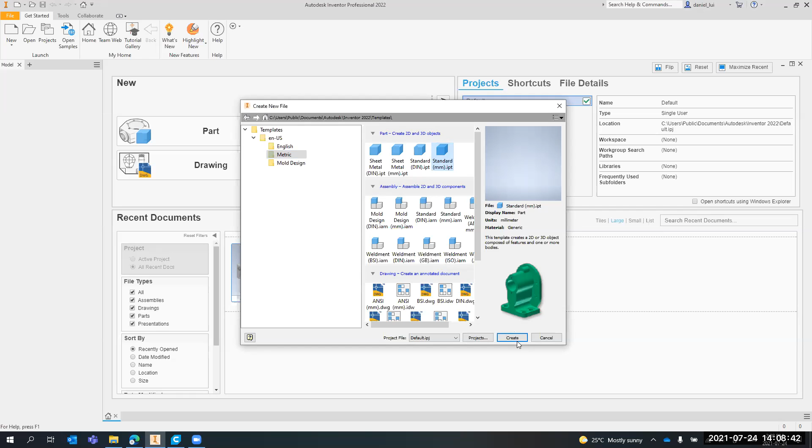You want to open a standard millimeter file. You can also open an inch file if you want, which would be in imperial units, but I think millimeter is easier for everyone to work with. So let's all use millimeter to standardize it. I'm going to create a millimeter part file.

And this is your canvas, your blank canvas. You have nothing right here. Okay, let me return to the slides. Where are slides? Here are slides.

Now we can look at the general interface of Autodesk Inventor, how to look around. So number one is the view cube. You would use the view cube to look around. Most of you have probably looked at Tinkercad already, and Tinkercad has the same view cube. Switching to Autodesk Inventor, it's this thing right here. This is the view cube, and you just drag it around like this to look around. Of course, right now it doesn't make a difference because we're just looking at blank space.

But that's what you would use when you have a part and you want to look at different angles of it. Okay, what's next then? On the left side, you have the model browser where you can see all your created features. Right when you start your part, you're not going to have any of this, just your default things, and it's not going to do much. But as you make more things, extrusions, fillets, you're going to see more things fill up here, and this is where you keep track of all the different features you make.

So then you might ask, what is a feature then? A feature is any object that is of interest. So a sketch, maybe if you're to draw a circle, you could call that a feature. Maybe if you're to make that into a cylinder, you can call that a feature too. Anything that is of importance will show up on the left side as a feature.

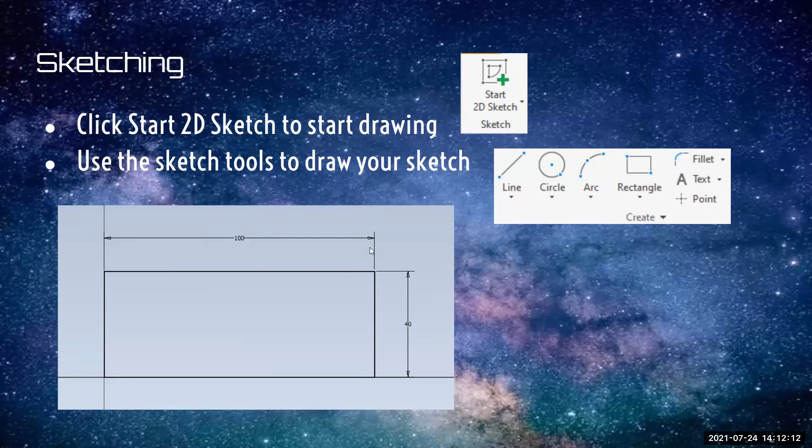So you may click Start 2D Sketch to start a drawing, and that's this button right here. And then you may use the sketch tools to draw your sketch. So what does that translate into in Autodesk Inventor? If we go here, you'll see the button here, it says Start 2D Sketch. So I'm going to click that.

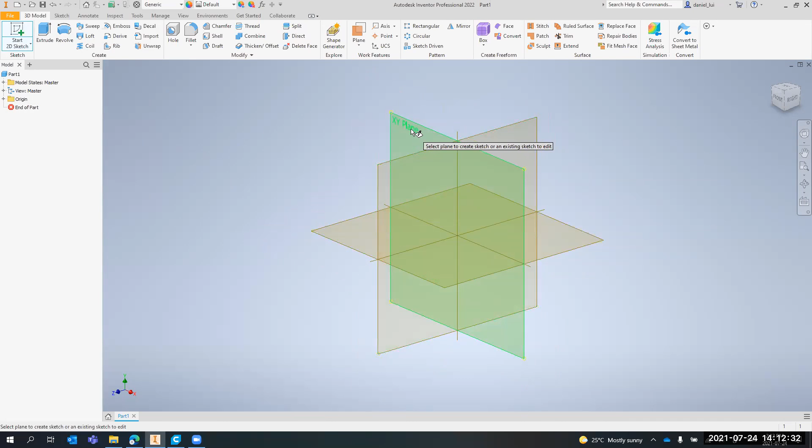And it's going to present me with three planes: the XY plane, the XZ plane, and the YZ plane. Typically you can probably start with the XY plane. It doesn't matter, but I'm just going to start with the XY plane. And you got your coordinate axis - you can see down here, left to right is X, and up and down is Y.

So I'm going to draw a rectangle then, to start my car body. And what dimensions do I want to make it? I'm just going to make it to the maximum dimensions, so that's 100 millimeters. Let me zoom out a bit. 100 millimeters by, how much was it? 50 millimeters.

Right then. I just noticed something actually. This might be relevant to you.

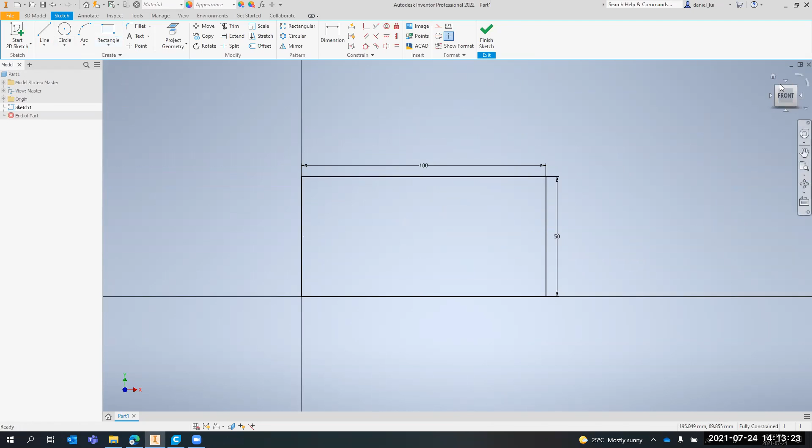If you installed Inventor and looked around, you might have noticed that when you try to zoom out by scrolling the mouse wheel downward, you're actually zooming in, and when you want to zoom in, you're zooming out. That's kind of a weird quirk, and I can show you how to fix that right now.

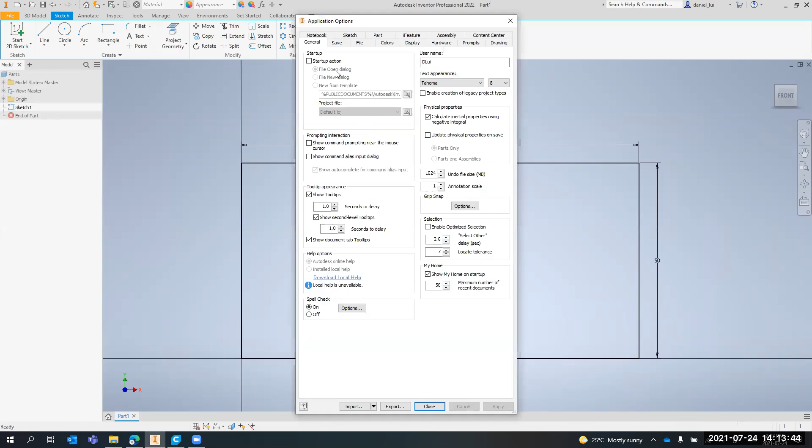If you go to File and click Options, then go to... let's see here. Hardware prompts, gotta be somewhere here. Oh, right here. If you go to Display, you can go to Zoom Behavior and Reverse Direction, and click Apply. That makes your zoom more intuitive, because typically people would expect when you scroll the wheel down, you zoom out, and when you scroll up, you zoom in. So that's how you do that.

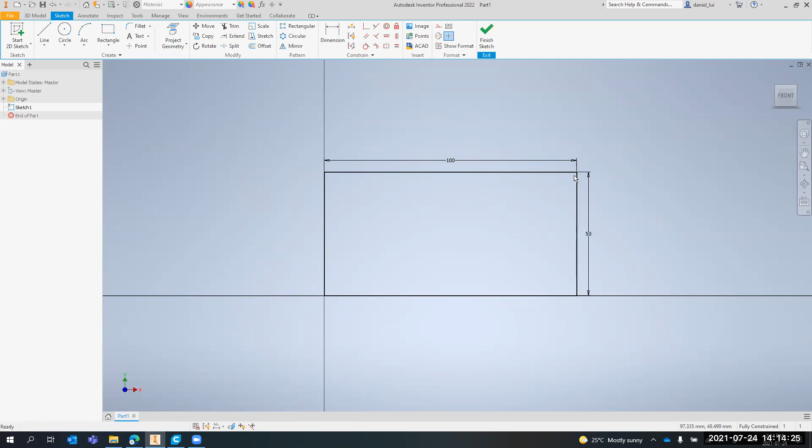All right, back to the slides then. So you can see here I have made my rectangle, right? And it's... oh, sorry about that. That should be 40, shouldn't it? There we go, 40. All right, 100 by 40, and that's just a regular rectangle. So that's what that looks like then.

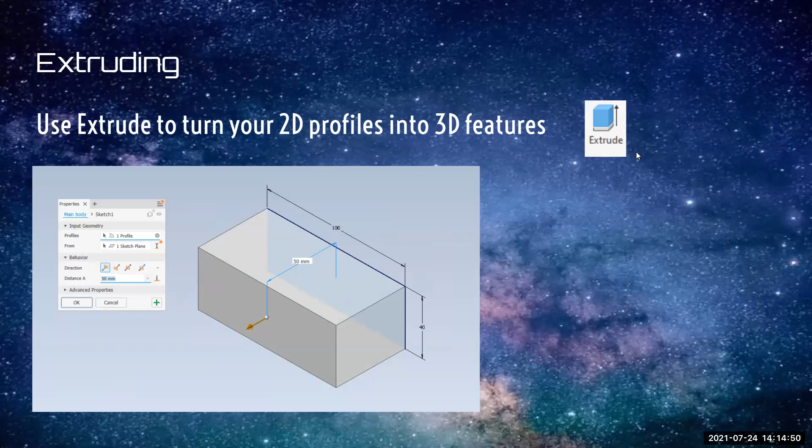So after I make a 2D sketch, I want to make it 3D now, right? What I can do is finish the sketch by clicking Finish Sketch, and click the Extrude button to turn my 2D profile into a 3D feature. So back to here, I will click Finish Sketch. And as I click Finish Sketch, you will see I now have Sketch 1 here.

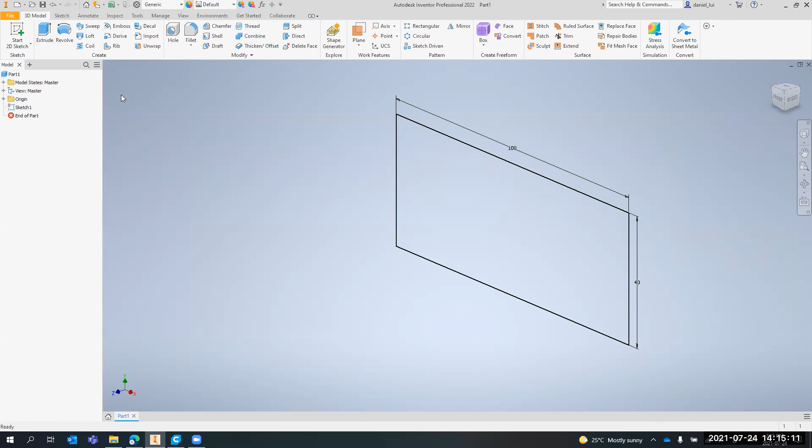And if I hover my mouse over it, it highlights it. So that's my first feature. But I want to turn that into 3D, right? So I'm going to click Extrude, and it's going to select that sketch feature profile.

And I'm going to extrude it by 50 millimeters. Down here, distance A, you can enter whatever number you want. I could enter 9,000, and it would be a super long extrusion. But 50 is the limit of our car design, so I'm going to put 50. Up here you can flip it, or make it go both ways, to different distances in each direction. But this is your basic extrusion, which is 50 millimeters in this way.

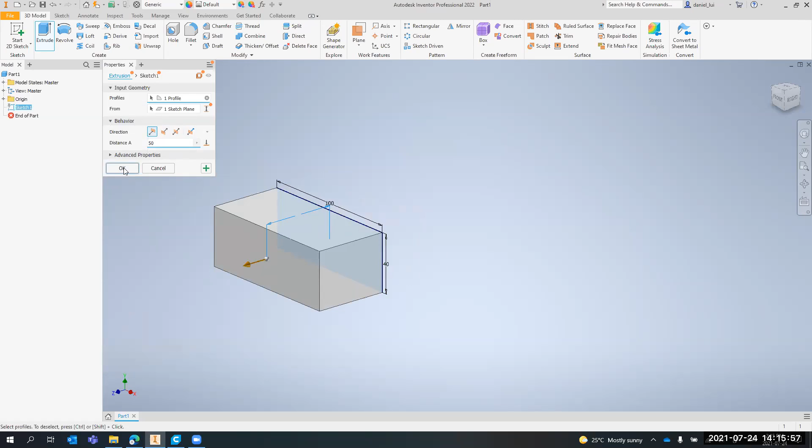So I'm going to click OK. And there we go, I got a box now. If you look on the left side in the model browser, you can see Sketch 1 has disappeared. That's because Sketch 1 has been used in the process of creating Extrusion 1. If I click the plus here, I can expand this list, and you can see Sketch 1 is now part of Extrusion 1. We had a sketch, and we evolved it into an extrusion.

All right, back to the slides then. How to edit an existing feature. A lot of times when you finish a part, you will want to edit that part, maybe make the extrusion longer or shorter.

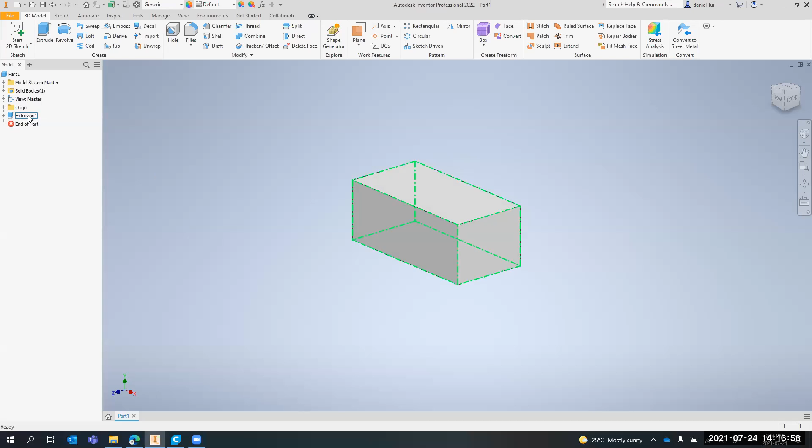So how you do that is you double click on a feature in the model browser, and you will enter the settings for it. Let's say I want to edit Extrusion 1, because remember I extruded it by 50 millimeters. Let's say I want to make it 30 millimeters instead. So I would just double click it, and go straight back into the settings.

And if I want to go to the sketch, I just double click the sketch and edit it. When you click Finish, it'll update. But I'm not going to change it because I like how it is now.

And of course, you have this End of Part thing at the very bottom. End of Part is basically where you want to cut off the program from rendering your features. Right now, End of Part is below everything, which means it's fully rendering everything, so you can see everything I've done. I haven't done much, just made a cube, or a parallelepiped.

But if I want to not see what I just made, I can drag End of Part upward over here. Now I've gone back to a state of time where I have made nothing, so right now it's not a very useful thing to use.

Right now it's not a very useful thing to use, but say you have more things in the future and you want to see what it looks like at an earlier time, it can kind of be helpful.

Okay, moving on, putting text on a surface then. Before I do that, I suppose I should make this look more like a car. So I'm going to use all our previous knowledge to show everyone how to make a car shape out of this box shape.

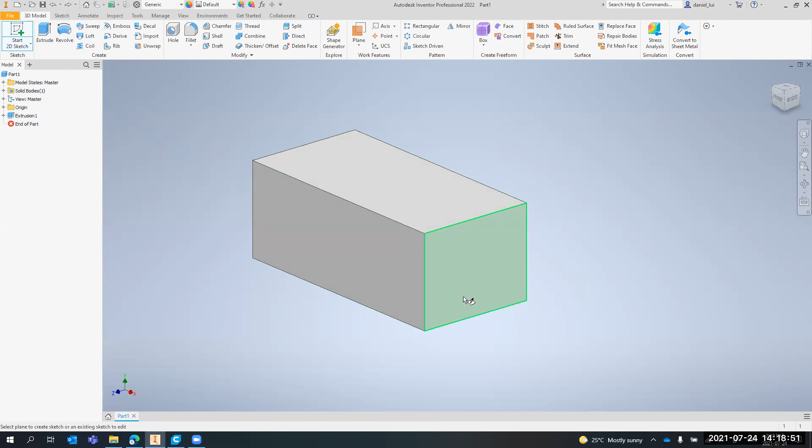What I can do is start a 2D sketch on any surface I've already made. I'm going to start it on this surface right here. Now I'm drawing on this plane. First, I want to make holes for the wheels. Let's say I want to make hubs so the wheels are recessed into the car body—maybe that's more aerodynamic.

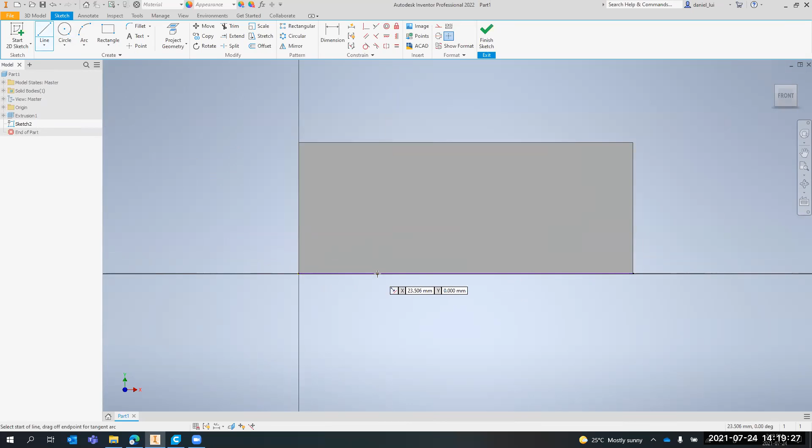So I'm going to use the line tool to help guide me to precise locations where I want to make holes. Let's say I want the center of a hole 5 millimeters from the bottom. I would go on the line here, go 5 millimeters up, enter 5, press enter. Oh, that did not work. Let me try again. I want to go 5 millimeters. Oh, that is not working.

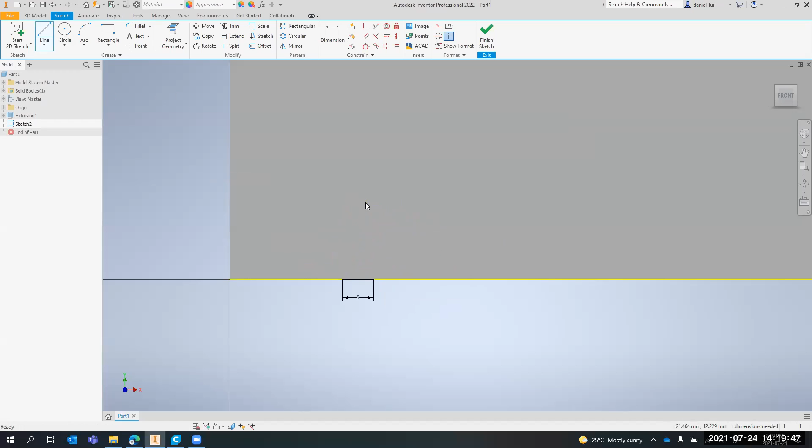Well, that worked. Okay, I just drew a line going up. If you want to change it, you can always press the dimension button here. You click this, and I want to make it 5. So there we go—we have a 5 millimeter line going upward.

And that can help us place our circle like this. Remember that the wheel is 30 millimeters in diameter, so I want to give it some clearance. So I'm going to say, let's go with a 33 millimeter wide circle.

Lastly, I want to make it like a car hub for a wheel, so I want it to be straight down here. I can go here—this is tangent to the circle. I can go straight down like that. This is tangent to the circle. I'll do the same thing on this side.

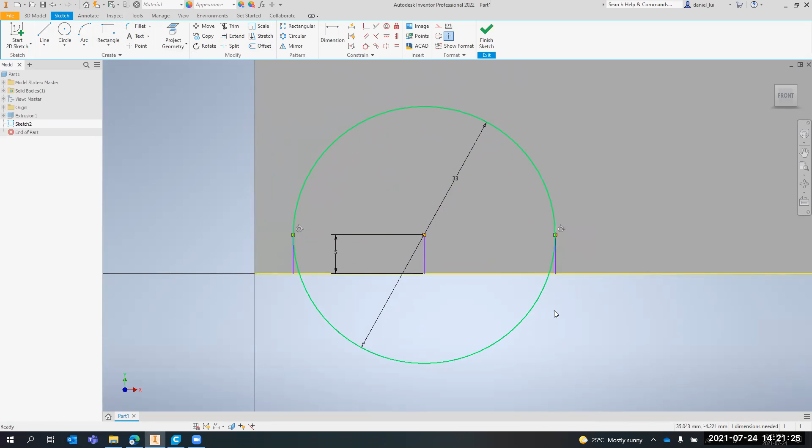Now what I want to retain is this outside part, so I can delete what I drew before—I'll delete the circle. Not yet, actually. Before I delete the circle, I want to make an arc. So I'll use the arc tool: click first point, click second point, draw up, match it with the circle, and now I have an arc tool. Behind the circle is this wheel hub. So if I delete the circle, which I will do right now, I now have this hub for the wheel. I don't really have to delete that—I'll keep it for now.

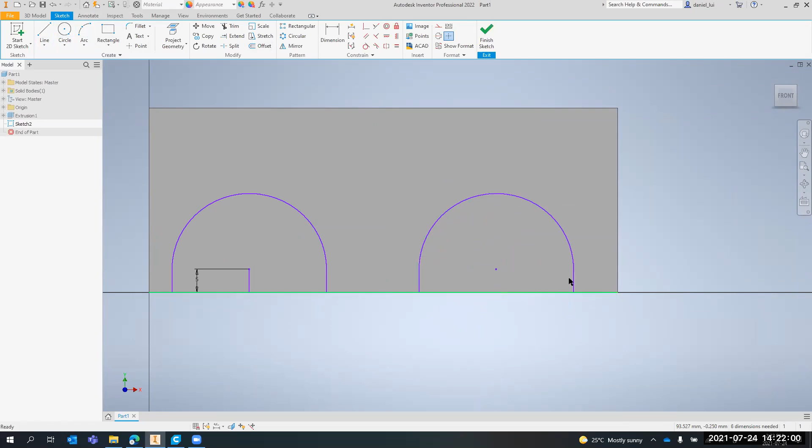All right, so I have one hub for the wheel. Now I'm going to do the same thing over here somewhere. I'm going to create a 33 millimeter diameter circle, take a line, draw down there, take a line, draw down here, take an arc, complete that hub, and delete the circle, which helped us earlier but we don't need it anymore, so we're going to delete it.

All right, now we have these two wheel hubs, and—oh wait, we're not done actually. We have to close this profile like that. Okay, now we're done with that, and we're going to close this profile like that. Okay, so we have closed the profile.

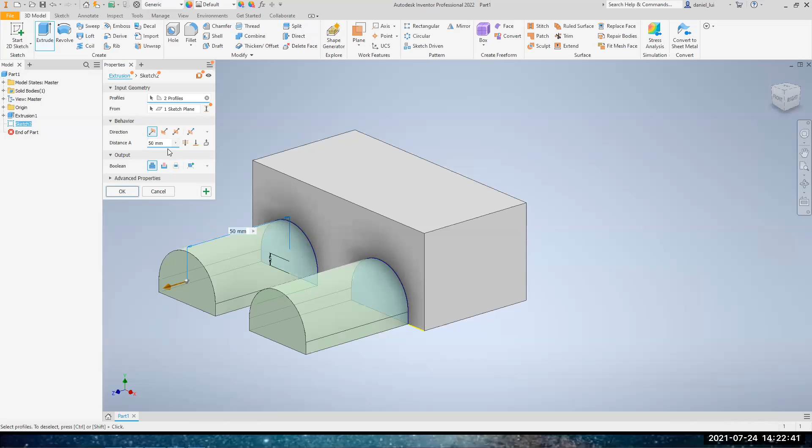These are fully closed sketches because when you extrude, you need closed sketches. So now that they're closed, I can select them. I'll select this one and this one, but instead of extruding outward, I want it to go inside of the car's body. So I'm going to click this to flip direction, and make it—if you recall, the wheel's thickness is 9 millimeters.

So I'm going to give it a bit of clearance. I'm going to say 11 millimeters deep into the car body. So I put 11 there, it's going inside, and it is cutting into the car body. I'm going to click OK, and there we go.

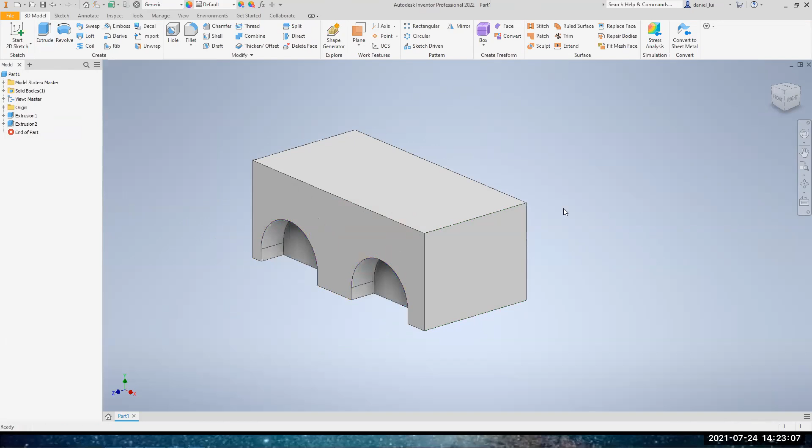We have now wheel hubs where the wheels will go. So if you imagine, there will be a wheel right there, and there will be a wheel right there. But next, we still need holes for the axles, right? We need 2.2 millimeter holes for the axles.

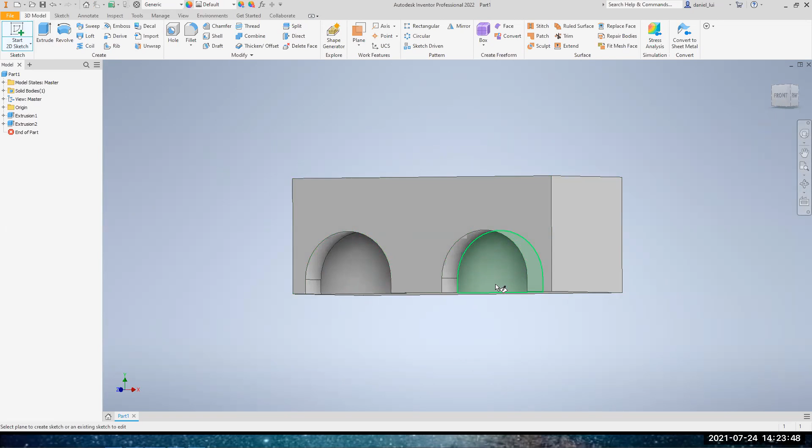So we're going to click Start Sketch again. We're going to click any of these faces. Do you know why we click any of these faces? We don't want to click this face, because if we click this face, we are going to be drawing on air, like in this blank area. We want to draw on here, right? So I'm going to click any of these faces. I'm just going to click this face.

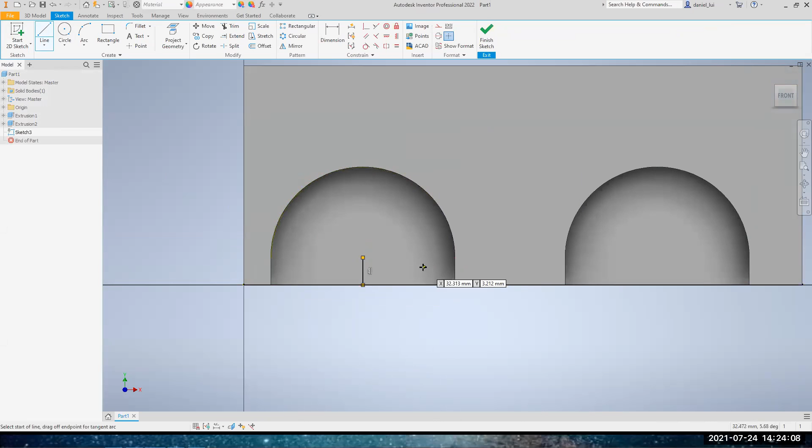And I'm going to use my line tool again to help me guide where I want it to go. So let's see here, you can see it sort of snaps like there. There we go, I've got a 5 millimeter line. You can use that to give you a point of reference, 5 millimeters from the bottom.

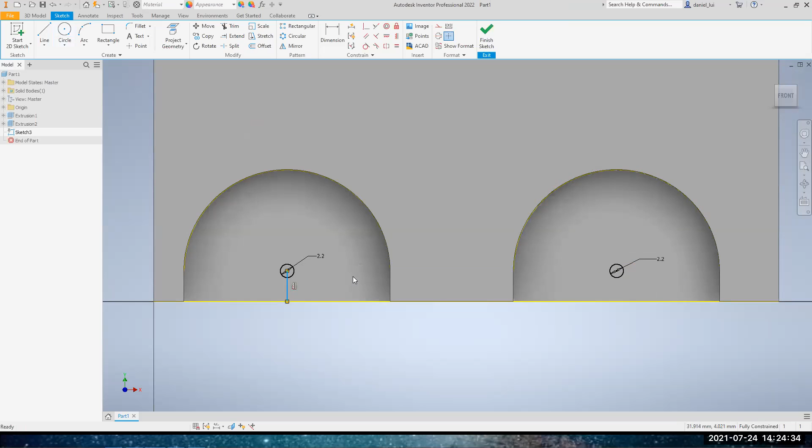I want to have a 2.2 millimeter circle. So 2.2 millimeters, I'm going to enter that in right now. 2.2, enter. And I'm going to do the same on this side, guide myself down there, 2.2 millimeters, enter. We don't really need that line, but you can keep it if you want, or delete it if you don't. Doesn't really matter. And I can click Finish Sketch.

So now we're going to do the same, right? We want to make 2 holes going through the car body. So I'm going to use the Extrude tool again, very important tool. I'm going to click this, and click that. I want it to go inside of the car, so I'm going to click flip, and I want it to go through the entire thing. So instead of entering a distance, I can go to the right here, and it's going to say through all. If I click through all, it now makes the axle through the entire body of the car.

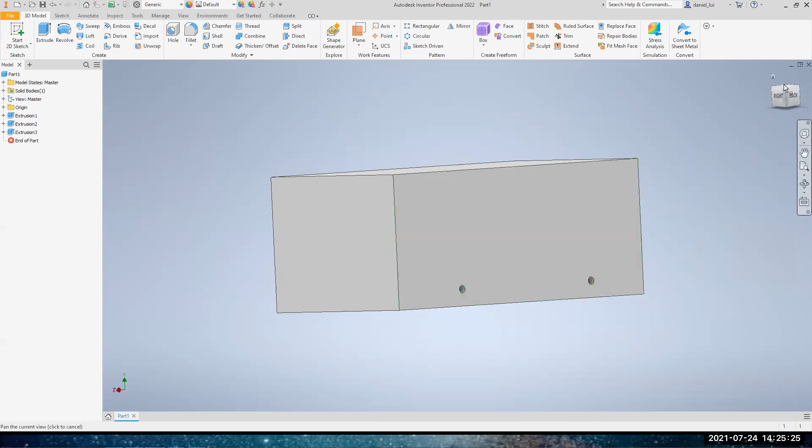While you're making this, if I were to take my time, I would be making the hubs on this side as well, because of course we want wheels on this side too. But for the sake of time, just for this demonstration, I'm going to focus everything on one side. But really, I would just do the exact same thing to this side as well. It's just all symmetrical, right?

All right, so now we have our very, very basic car shape, right? I mean, if you wanted to make a car like this, you could enter this into the race, right? This is kind of all you need to make, because it's got wheels and axles. That's kind of all you need to do. But we want to make it more fancy, right?

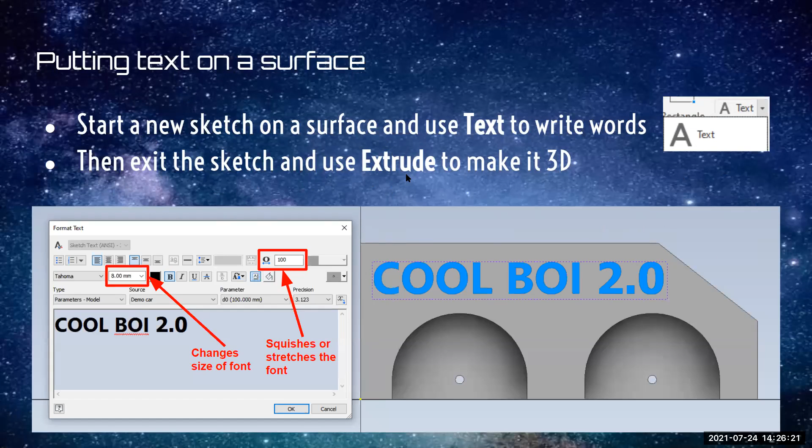So going to the slides again, putting text on a surface. As you know, the rules are everyone wants a team name on their car. So what you would do is start a new sketch on a surface and use the text tool to write words. Then you would exit the sketch and use the extrude tool to make it 3D. The first part might be a little bit new to us, so I'll show you how to do that.

So you're going to click Start New Sketch, and I'm going to click this face right here. You can click any face you want to put it on, except for the bottom, of course, because why would we want to put words on the bottom of a car, right? So I'm going to click this face.

And I'm going to click text, and draw an arbitrary box somewhere here, and it opens this window to enter your text. So what I can enter is Cool Boi 2.0 - this is our upgraded version from our Cool Boi 1.0 from last workshop. And important things to note when you're in this window, this box right here is basically your font size.

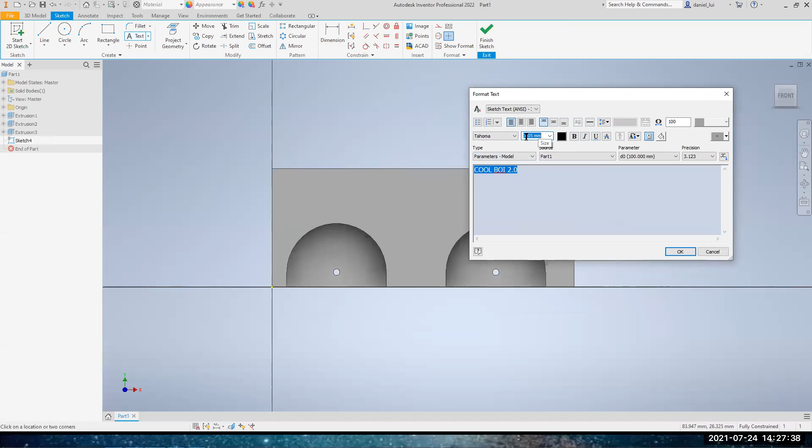So where in maybe like an email or Microsoft Word, you will have maybe like 12-point font, 3-point font. Those are based on pixels. What we are looking at here, because this is an industrial CAD software, we're looking at millimeters. So this tells you the height of your font. Right now it's kind of too short for us. If I click OK, you will see that the height is like 3.5 millimeters.

So I'm going to double click this text. I want to make it taller. I'm going to select the text and make it 8, because I think 8 is reasonable. Then I click OK, and now the text is 8 millimeters tall.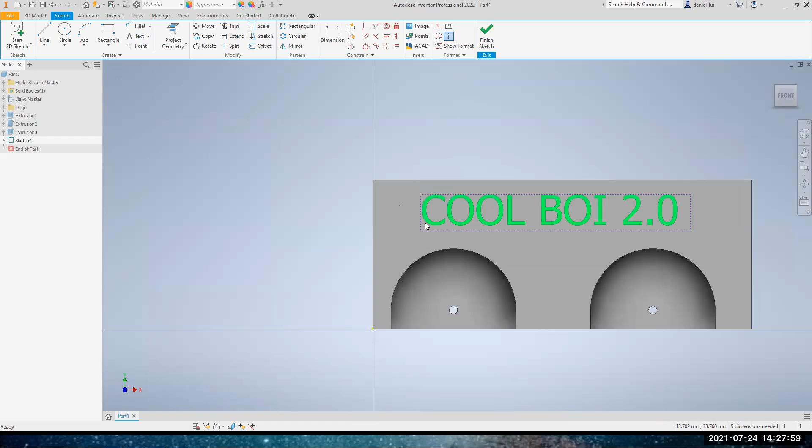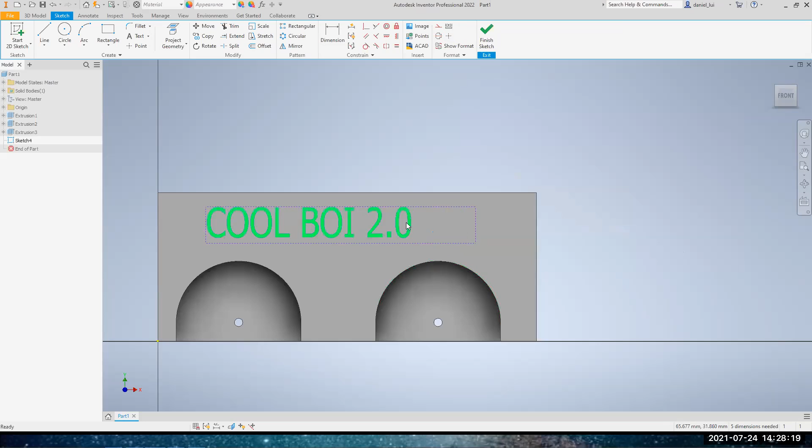There's also another thing I want to show you guys, which is this box right here - the stretch percentage. If you enter a percentage less than 100, you can squish your text. So if I put 80 and click OK, it gets squished. If I put 120 and click OK, it gets elongated. And of course, 100 is your standard proportional text.

Okay, finish sketch. Back to the slides then.

Planes. Next up is planes. A lot of the times you might want to draw a sketch that is not on an existing surface, because so far we have just been drawing sketches on surfaces that we already extruded or made. So maybe you want to make a floating sketch - this sketch is like it's in the air, floating above the surface of this car.

So what we're going to do is navigate to this plane button. We're going to click the drop down menu, and offset from plane will allow us to do this. There are other ones you may explore, like parallel, mid plane, but offset is what I find to be the most useful.

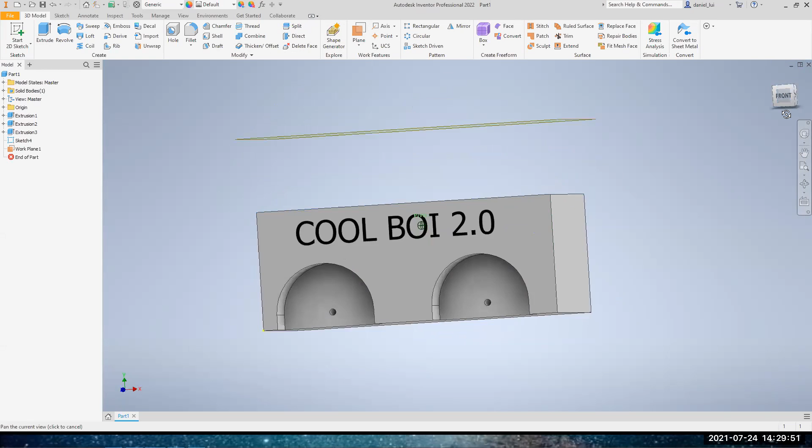So I'm going to click plane here, offset from plane, and the top surface here. And I can offset it by however I want. What should I put then? What looks good? 25 maybe? Sure, 25. All right, now I just made a plane 25 millimeters above the surface of the car.

Now, of course, if I were to draw above it, I would be exceeding the size limit. So do keep that in mind, but this is just for demonstration purposes. So on your model browser, you can now see work plane 1.

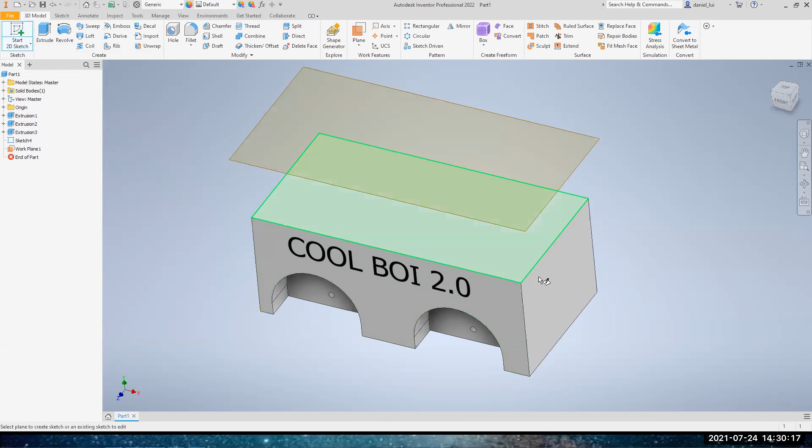So now if you go start 2D sketch, instead of selecting a face here, you can select this plane here. And we are now drawing a sketch in the air floating above the car.

So what should I draw then? Let's draw a rectangle. I'm going to draw a rectangle, right? I don't know, that looks good, I guess. And I click finish sketch, and you can see that there's a rectangle floating above my car now.

And once you're done with the plane, if you want to get rid of it because it does kind of obstruct your view of your actual model, you can right click the plane in the model browser, and you can uncheck visibility, and you'll get rid of the plane and just see what you drew.

Moving on, you have lofting. So lofting is what you would use when you want to create a smooth transitional shape between two sketches.

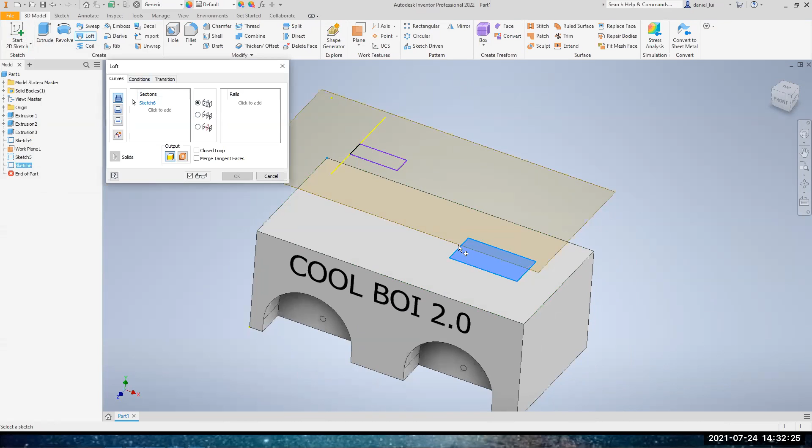Now I can click loft, right here. I'm going to click loft, select one face, and then select the second face, and it's going to automatically make a nice smooth transitional shape that transitions from this large rectangle to the small rectangle.

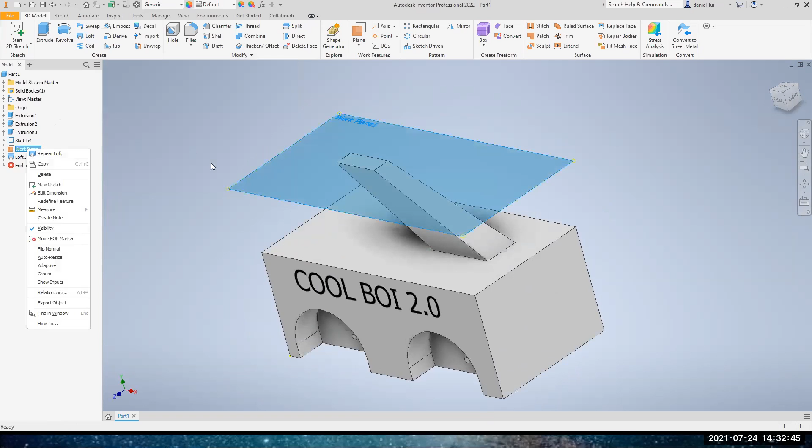If I click OK, I got this nice fin looking thing, right? Very aesthetic. If I right click work plane and uncheck visibility, you can see your model in its full glory. You got this random fin looking cool thing here. So that's how you would use the loft tool. Going back to the slides then.

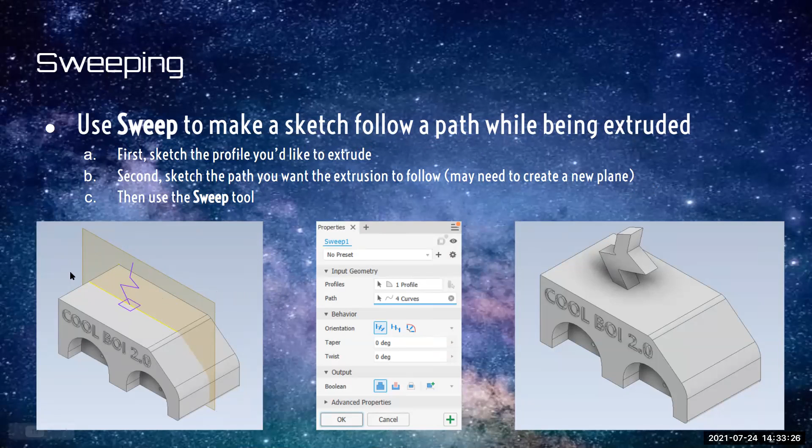Next is sweep. Sweep is what you would use to make a sketch follow a path while it is being extruded. I want the extrusion to follow this sort of lightning bolt path. What I would do is make a plane in the center of the car, cutting through the center, and draw it up like that. Then I draw another face on top of the car, and use sweep to sweep it up like that. I'm going to show you how to do that.

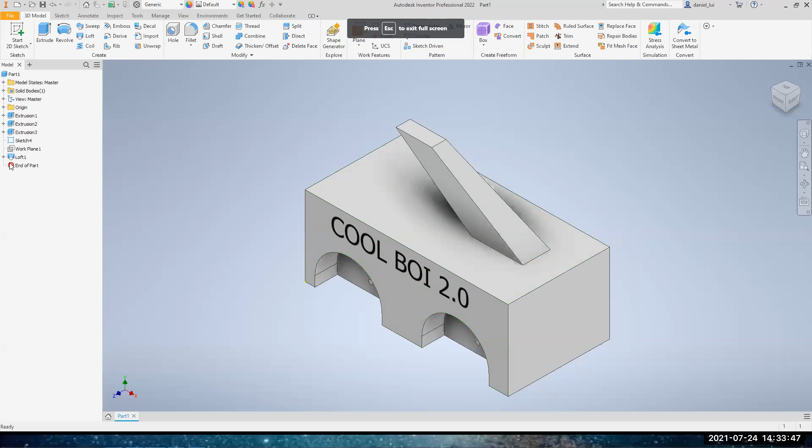Back to Autodesk Inventor, I'm first going to get rid of this. I'm going to suppress it like that because I don't want to see it anymore. I'm going to draw a rectangle again—it doesn't have to be a rectangle, it can be a circle or any shape you want—but I'm going to draw a rectangle on the roof of the car.

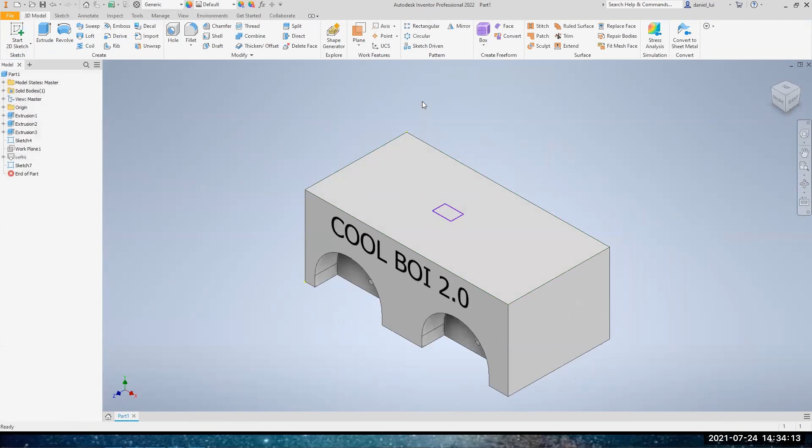Now I need a plane, so I'm going to click offset from plane, and I want to offset from this face because I want it going into the car. I want it to go like that. I know my car is 50 millimeters wide, so if I go -25, it's going to put me straight in the center.

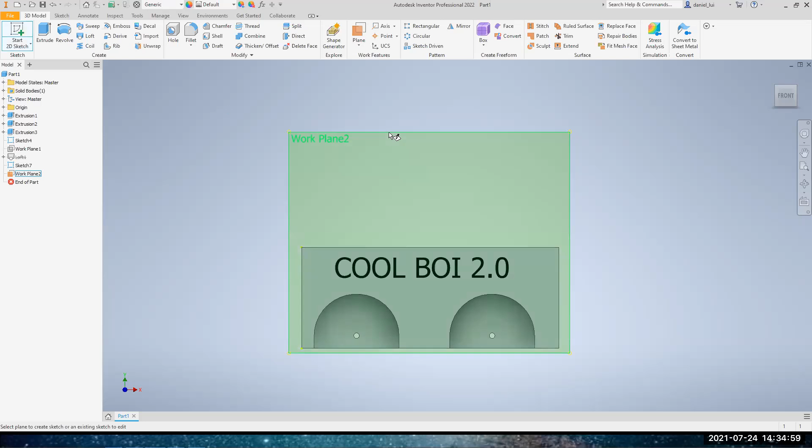So there, I now got a plane in the center of the car. You can make this plane bigger if you want—it doesn't actually affect anything, but it just makes it easier to visualize, I guess. Then I'm going to click Start 2D Sketch on this plane.

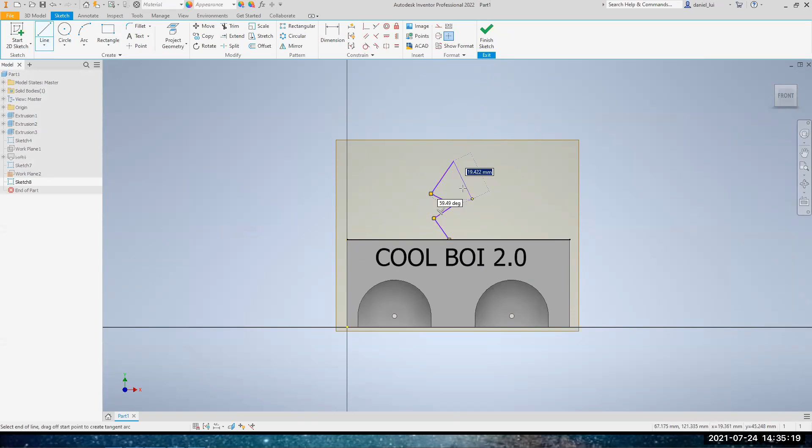I'm going to draw a line from the center of this square using the line tool right there. I don't know what a lightning bolt really looks like, but I guess this looks kind of like it. As you can see, now we got a line coming from our rectangle.

If I click sweep, it's going to let me select this, and then it's going to let me select that, and then I can click OK. And then I now have this fancy lightning bolt sticking out randomly from the top of my car.

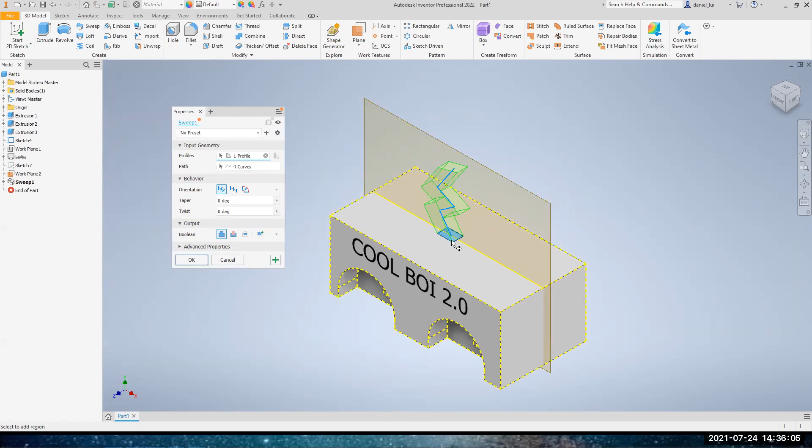Because this is a little bit complex, I want to explain it more. What you would do is first select the base profile, so that's your square, and secondly select your line right there. I'm going to redo it because this is kind of important.

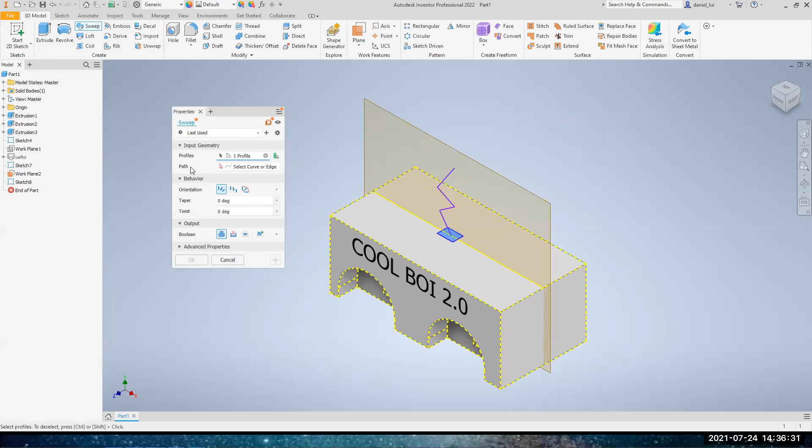I'm going to click sweep. It says select profiles first, so you click it—this here should be automatically selected—and then you click the second one to let the program know you're now selecting the path you want to take. Then you select the path, click OK, and you got your lightning bolt. That's how you use sweep, and sweep is probably the most complex tool we'll be going over today.

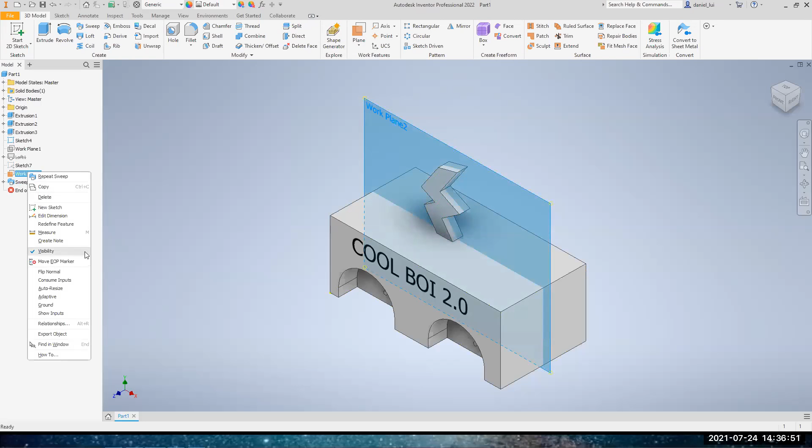Now that I'm done with the plane, I don't really want to see it because it's blocking my view of my glorious car, so I'm going to make it invisible. Now I can't see it. All right, so if I re-enable my loft, you can see it's right there—this is what a loft looks like.

Loft is a feature where you have one face here, another face here, and you're creating a smooth 3D feature between the two faces.

And if you look at sweep, you got a surface and you want to extrude it, but you don't want to extrude it just straight. You want to extrude it in a nice fancy path like that. So that's why you would use sweep.

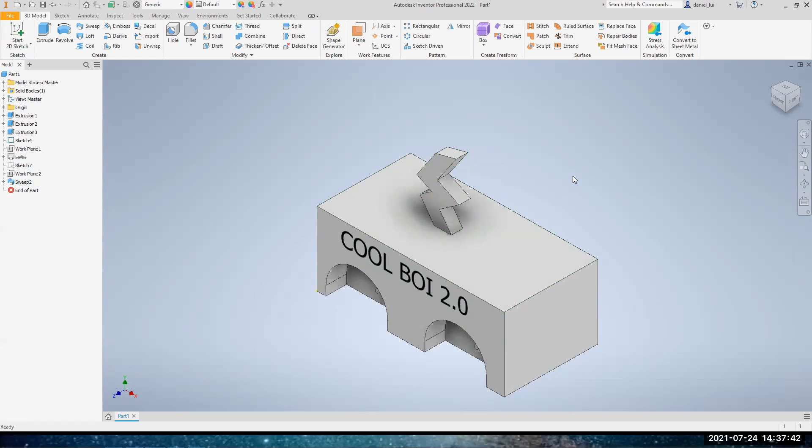Or you could use chamfer, which is sort of like fillet, but it creates a transitional surface at an edge. You might wonder what that means, so I'm going to show you right here.

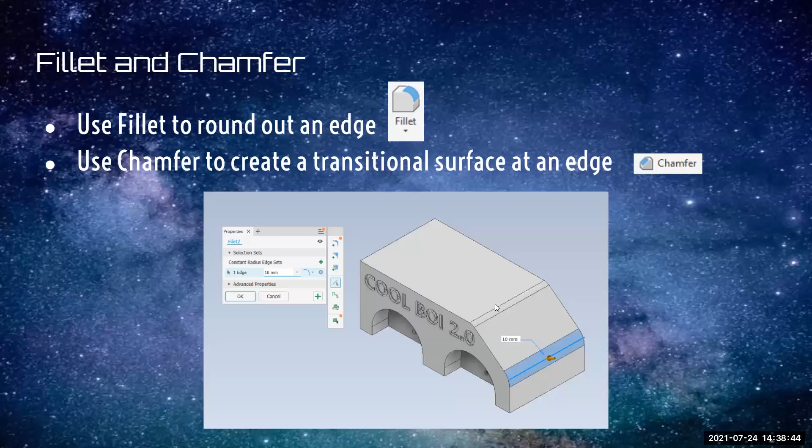But before I do that, I want to make it look more like a car with a windshield, so I'm going to make a quick windshield right here. Going back to the basics of Autodesk Inventor, I would start a 2D sketch on this surface, like I've done many times, drawing with a line like this.

Let's see what looks good. I guess that looks good. Drew a line there, I'm going to draw a line down to here, and then draw a final line connecting it, because remember, you must have a closed sketch. So I'm closing up the sketch, and now we have a closed triangle. Going to finish sketch, we now have a triangle at our car here at the front.

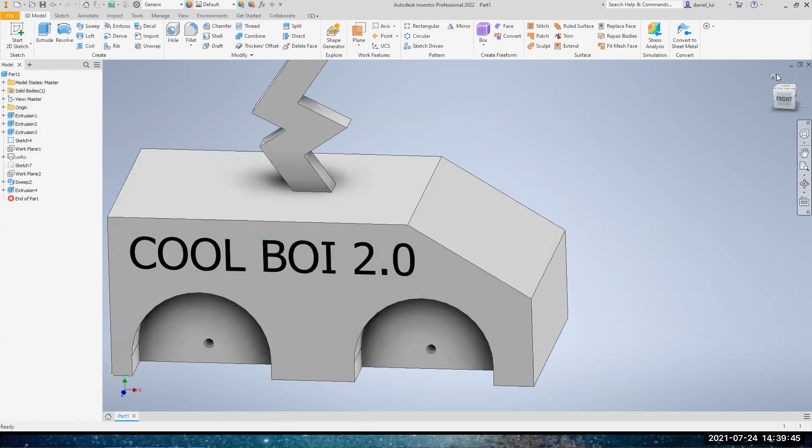And we want to extrude it like that, the other way, through the entire car, so we click through all. And boom, we got a windshield in front of our minivan, or whatever this car looks like. I mean, it's a minivan with a lightning bolt on top, so I guess it's a very fancy one.

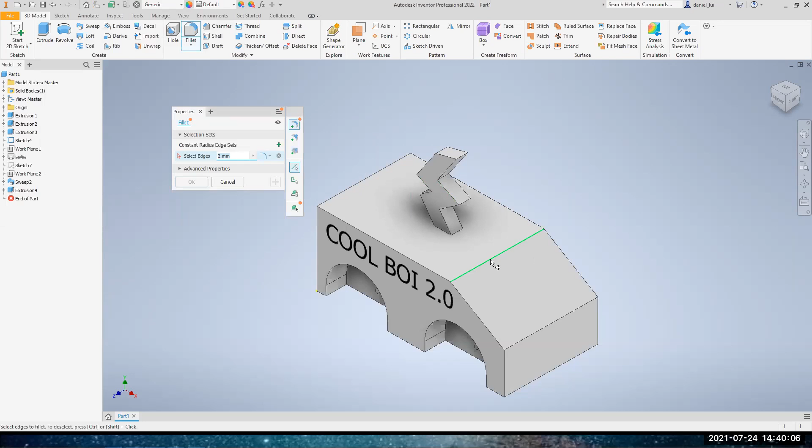Now I can show you the fillet tool. Fillet is right here, and chamfer is its neighbor right there. I'm going to show you fillet first. Fillet will round out your edges. If you click here, it automatically sets it as 2 millimeters, but I can make it more, maybe 5.

And you got a nice rounded edge right there. Let's say I want to round out this one. What I would do is click that edge there and round it out, let's say a 10 millimeter fillet. And as you can see, it creates a round surface, nice and round.

All right, so now I'm going to show you chamfer. Chamfer is kind of like fillet, but instead of rounding, it creates a sharp transitional surface. Let me undo everything, and I'm going to replace my fillets with chamfers.

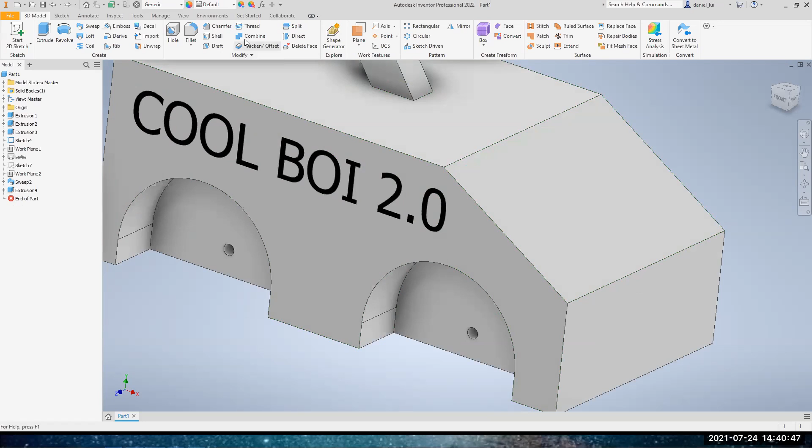So I'm going to click here, 2 millimeter chamfer, okay sure. And as you can see, instead of making a rounded surface, it just makes a straight surface. So there's a subtle difference there, but there will be a bigger difference if I apply it to here.

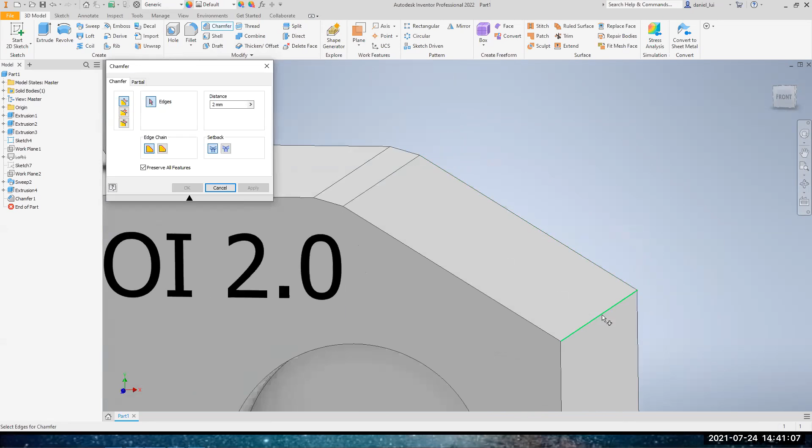So I'm going to click chamfer, click this edge, and as you can see, let me make it bigger, let's say 5 millimeters. There we go, as you can see, it creates a transitional surface.

So instead of going from here straight to here, it creates a middle surface that goes like that, and then it goes like that. So it's less of a sharp edge, but it's not round like it would be if you were to use the fillet tool.

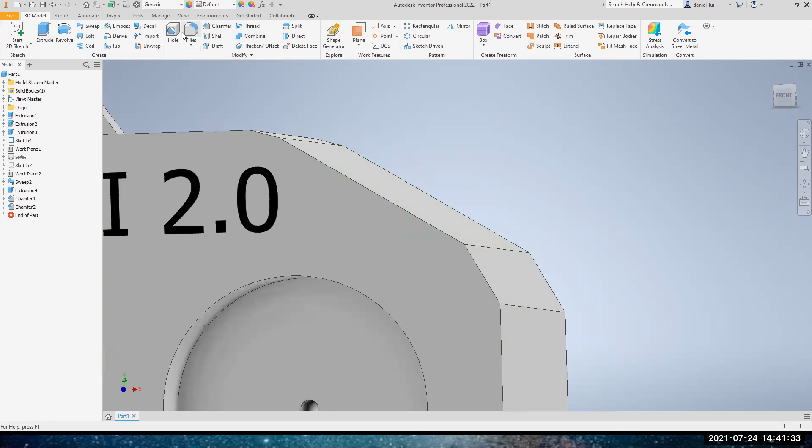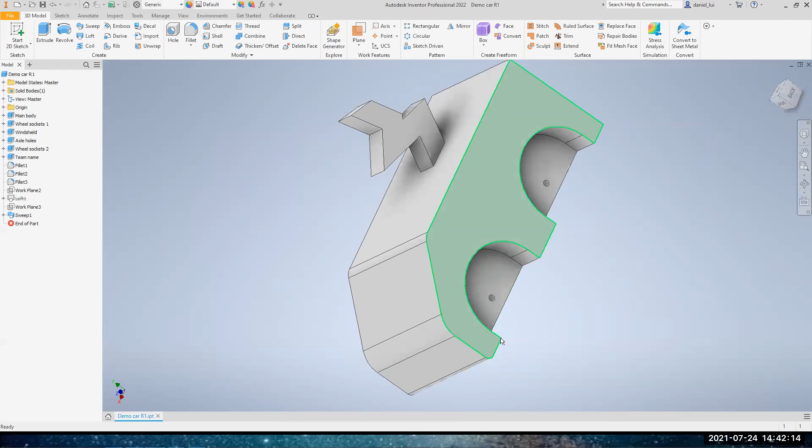This is the car that I made prior to this workshop, and it has basically everything, plus I did the wheel hubs on the other side as well. I decided to use fillets here and there to round things out, and I kept the lightning bolts. Of course it's outside of dimensions, so it's just for demonstration purposes.

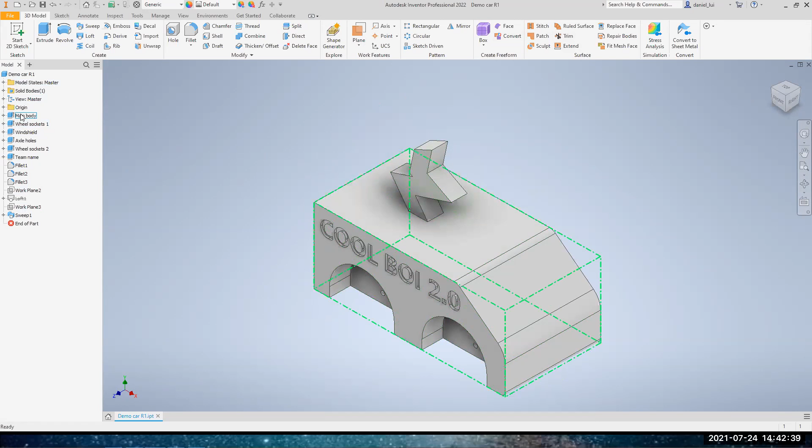So this is what the car looks like, and I'm going to do a quick recap of everything we went over. On the left side you have the model browser, with all your features here: the main body, wheel sockets, windshield, axle holes, wheel sockets 2 which is the other side, team name, fillet 1, 2, 3, and work plane 2 which is invisible.

Work plane 3 is also invisible, and we have a loft that is invisible. Let's say I wanted to change my sweep to a loft—I can always unsuppress it, and boom, now I have this.

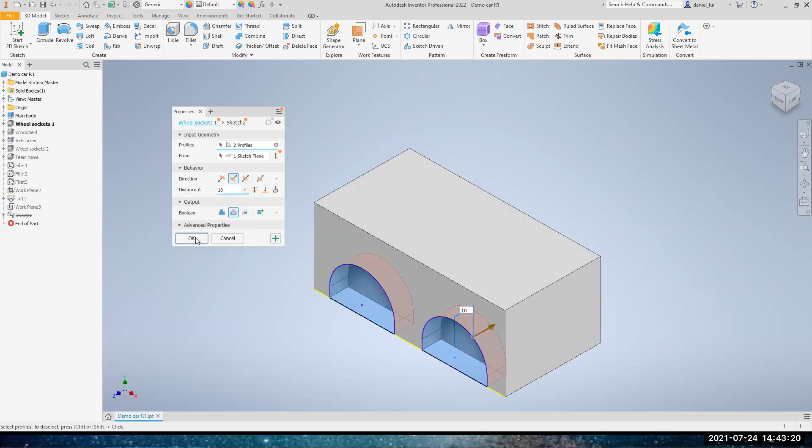If you want to double click into something, let's say I want to change the wheel sockets—I double click into the wheel sockets. Let's say I want to make it only 10 millimeters, then I can do that. I change it, and now it's 10 millimeters deep.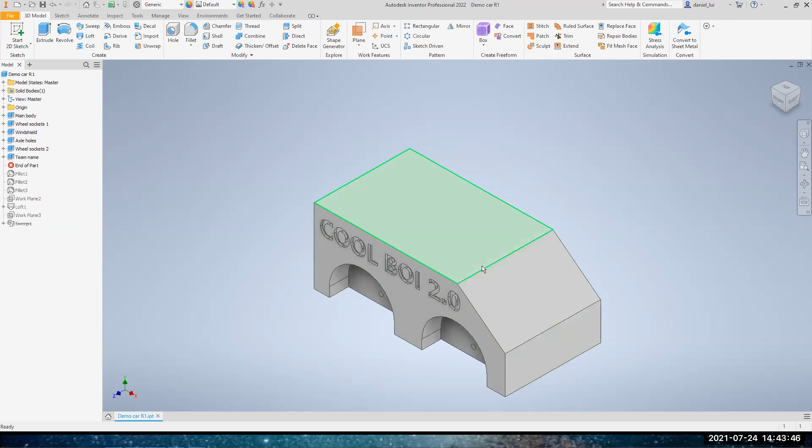End of part—I guess now is a good place to show you the use of end of part. So if I want to see my car at an earlier stage, let's say before I added any of the fillets, I can drag it up here. And this is what my car looked like before I added any fillets, because it's not rendering anything I made after that.

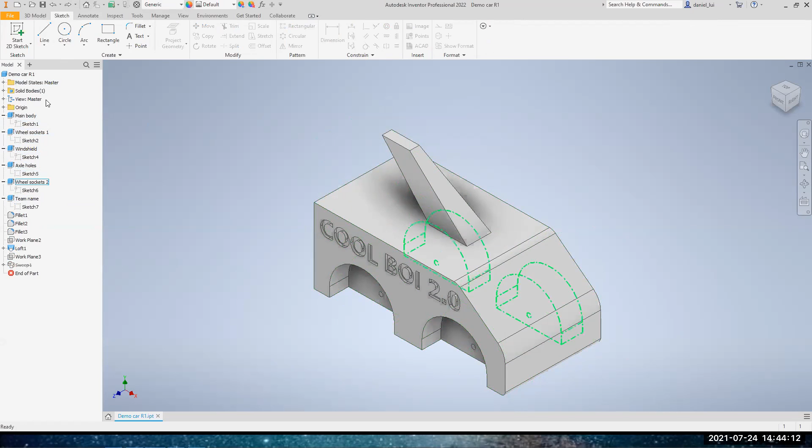So once again, the 3D model is where you do all of your 3D—basically everything you see on here. And if you expand everything under each 3D feature, you'd see the 2D features, right here—your sketches, which are comprised of lines, circles, arcs, rectangles, and text, because you need to use the text tool to create the team name.

Lastly, before you submit the file to us, you probably want to measure it to make sure everything fits within the size limits. I can go to Inspect, click Measure, and say, how wide is our car? I click this line, any line really, and it says 50 millimeters. Great, it's within dimensions, within the limits.

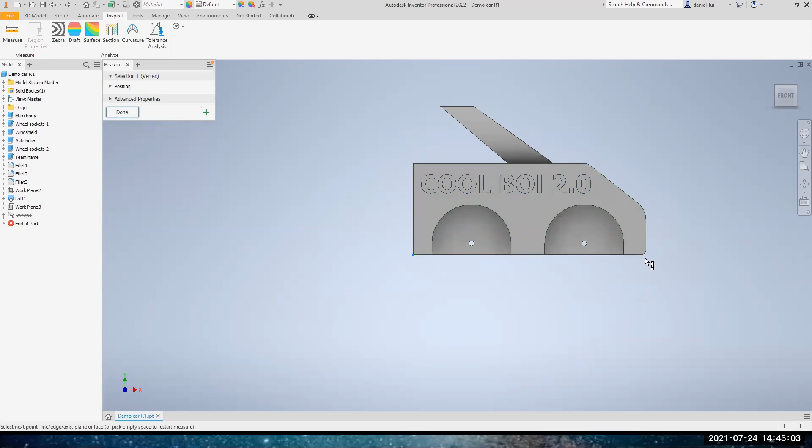Let's say I want to see how long the bottom is. I would click from here to around there, and that's 99.416 millimeters—around 100 millimeters, so that looks good, that's within dimensions. And let's see how tall it is.

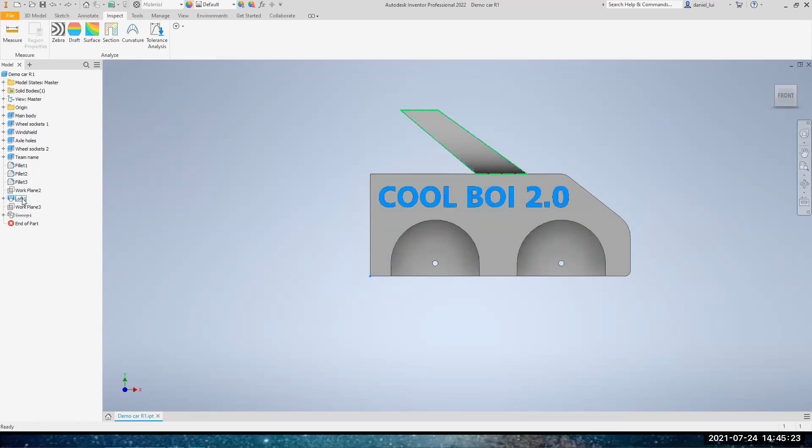Let's ignore this and suppress it, because if I were to actually submit this to print, I wouldn't be putting that. If I measure the height of this car, I'd click this length here, and it says 40 millimeters. So yes, this car is fully printable, fully submittable, and it is within the rules.

So let's go back to the slides. Now I want to show you how to save it as an STL file, because you can't just put a CAD file into a 3D printer and expect it to print—you first have to save it into a compatible file system.

In Autodesk Inventor, you navigate to the File button, press Save Copy As, then click the file type here and save it as an STL. You'll click the Options button, which brings up a window, and you have to set units to millimeters. That's very important, because if you set it to inches or something, your model might be massive and out of the limits.

And you can set your resolution to high, and that's all you need to do. Then you can click OK and continue saving. So now I'm going to show you how to do that in real time.

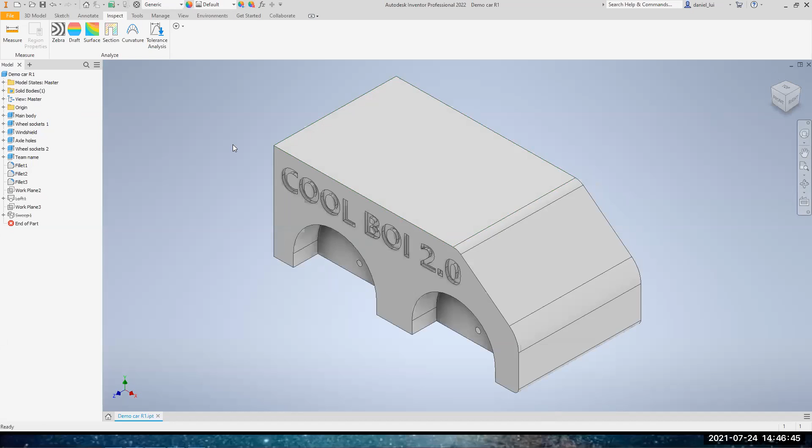From file, I go save as, I go save copy as. Now it's going to open the save copy as window. I need to select, instead of the default IPT, I need to select STL, which is down here.

I need to click options. I have to make sure it's millimeters, so this is wrong, right? This automatically went to centimeters, which is not what we want because we want millimeters. So I click that, I click resolution high, I click OK, and then I click save.

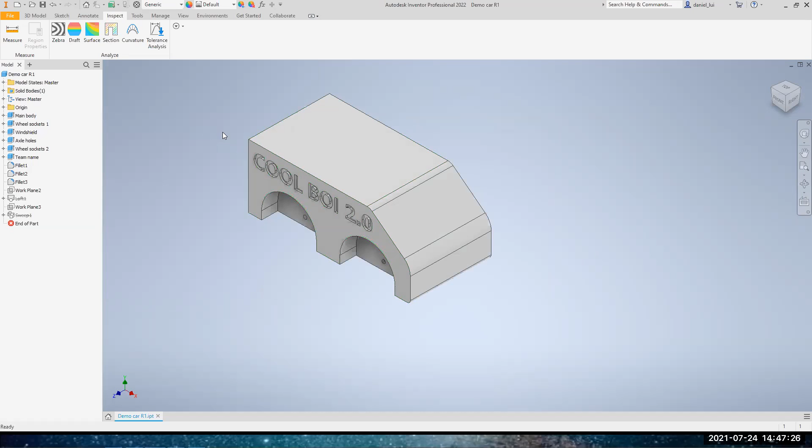So I have just saved my model car, my gravity car, as a file that I can send off to the 3D printer. But we can't 3D print it yet. We first have to slice it. So let's go over slicing then.

Slicing is what you have to do before you put it into the 3D printer, because the 3D printer can't just take a model and automatically figure out what layers, how fast, or what flow rate to extrude the plastic at. It has to be given to it very explicitly in very simple terms.

So what a slicer does is it takes a model and your settings, such as speed, infill, how much support you want, and the overhang angle, and it puts it into very basic movements for the 3D printer. It puts it into the most basic commands, like move nozzle to coordinate 1,2, then move to coordinates, move nozzle to coordinate 2,3, and it just does that.

So a slicer converts the model into instructions it can follow. It provides information such as the print time, mass, length of filament required, and cost, and allows you to adjust print settings such as speed, layer thickness, and supports.

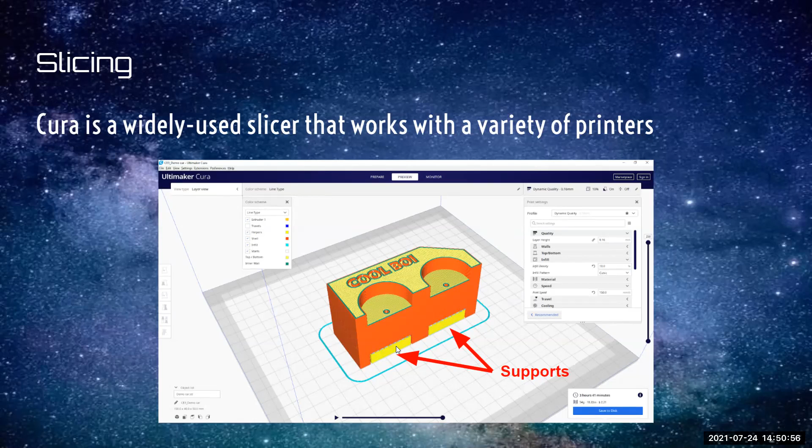What you can do after it's done printing is just use your fingernails or something like an X-Acto knife, and you can break off the support. It's really easy to break off because the slicer prints it not as dense up here, so you can stick a knife in there and just pry it off. And that's how supports work.

Things to keep in mind when you're printing, because 3D printers aren't perfect, and they're not invincible. They're not capable of printing anything you want in however orientation you want. So I just want to give you guys some design guidelines to make your prints more successful.

And these are just guidelines. You don't have to follow them if you don't want, but these are just guidelines.

Try not to have really small features. That's because 3D printers, just like 2D printers, have a resolution. They print in layers of 0.2 millimeters thick. So if you make something that is too small, the printer won't be able to print it clearly.

It might look like a blob once it comes out, right? So just try not to make anything too small. That mostly comes down to words, because words are usually pretty small things. So make sure you don't use too small words, symbols, or anything like that.

Next, every cantilever will need a support. And you might ask, what is a cantilever? A cantilever is just a right angle. If you see, I'm going to go back a slide here. If you look here, you sort of see this right angle here. I guess this part is what you can kind of call a cantilever.

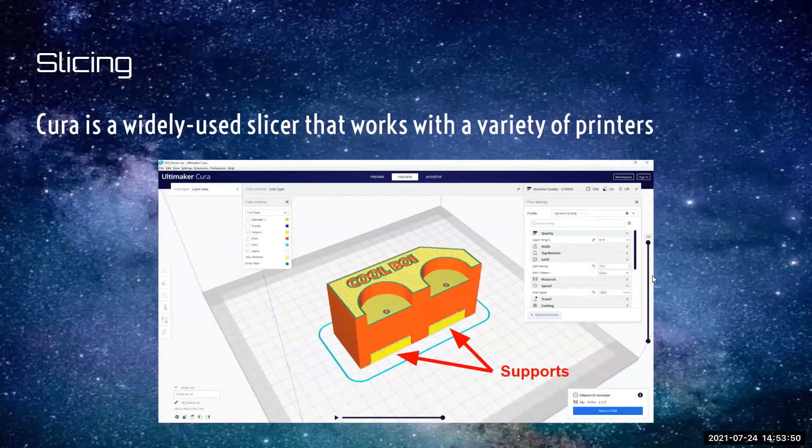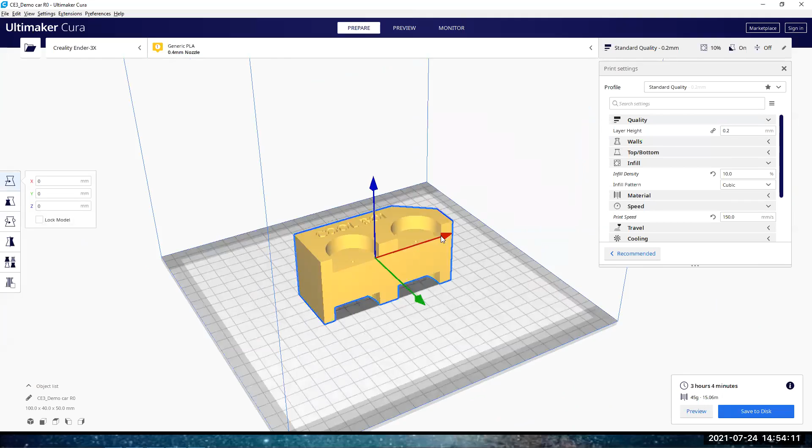And I guess I can also show you how it works in real time. So where's my Cura? Let me open it up right here. So this is what it looks like, right? I would click import, I would select the model, which I already have, which is right here. We have our cool boy, and on here we have our settings, right?

So we can select the layer height. I have selected 0.2 millimeters high. Infill density is 10%, print speed is 150 millimeters per second. And I want to generate supports, because if I don't generate supports, this area right here will fall out of the model. So what I'm gonna do is...

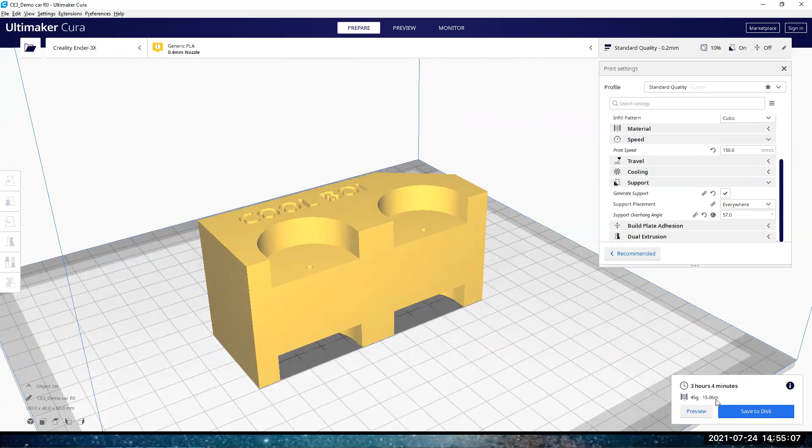I can click slice down here. So if I click slice, it computes everything, and it says it will print in 3 hours and 4 minutes. So I guess that gives you an idea of how long it takes to print something like this. It'll take 45 grams of filament, which is 15.06 meters, so it gives you an idea of how much filament it'll use if you are maybe low on filament or something like that.

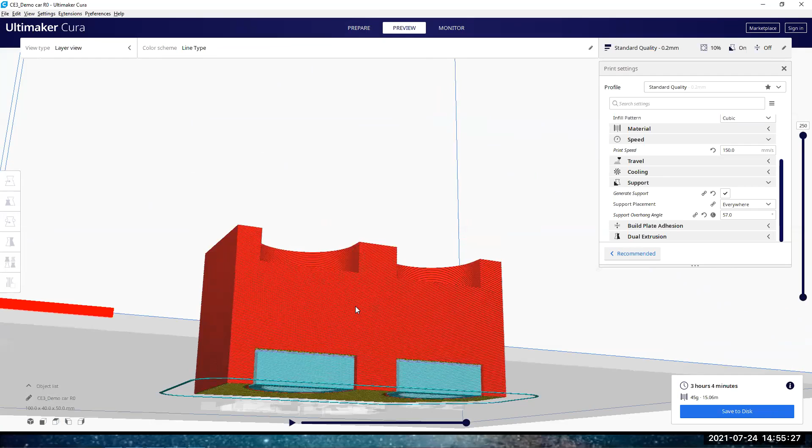And you can go to this tab right here, the preview tab, and it'll give you in a color-coded fashion what filament, what line is what type. So you can see here, this color means it's a support. This red color means it is an outline to make the general outline of the car. And this middle color in here is the filling, to fill in the car itself, right? So that's a rundown of what a slicing software is.

So what I would do is I would click save to disk. It would save it as a G file, a .g code file, which is just very basic rudimentary motions that a 3D printer will go through, and it'll execute it step after step.

All right, then back to the slides.

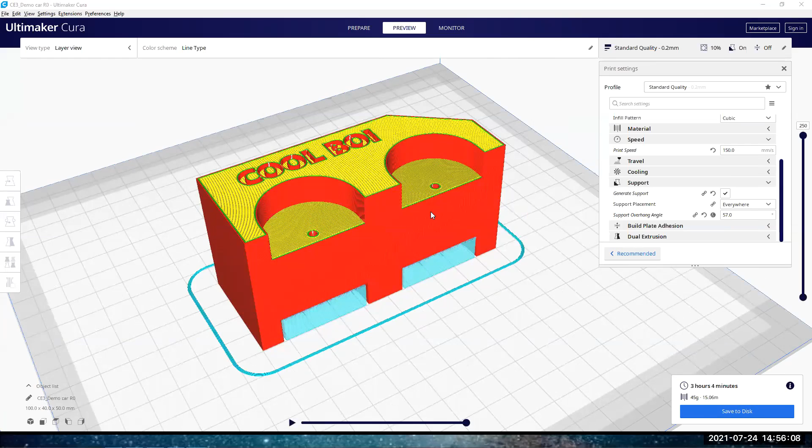Right, so improvements to the gravity car challenge. So we got some emails from you guys in the past week after the first workshop, and some of you guys said, well, maybe the dimensions are not reasonable. Maybe it would be more favorable if we could have a longer dimension for the length. Maybe instead of having 10 centimeters for the length, maybe we could go longer, right?

So I just want to open this floor up to everyone. If you could use the annotate tool right now.

Let's see here, how do I enable that? Oh, it should be enabled. So everyone, please use your annotate tool. If you have any ideas, just let us know, and I'll read the chat right now to see if anyone has questions.

So how this is going to work: we are planning to ask you participants if you are interested in increasing the build dimensions of length from 10 centimeters to 14 centimeters. Please respond using the annotate feature. Stamp a check mark for yes if you want it bigger, or an X for no if you want to keep the rules as is. One check mark per person, please.

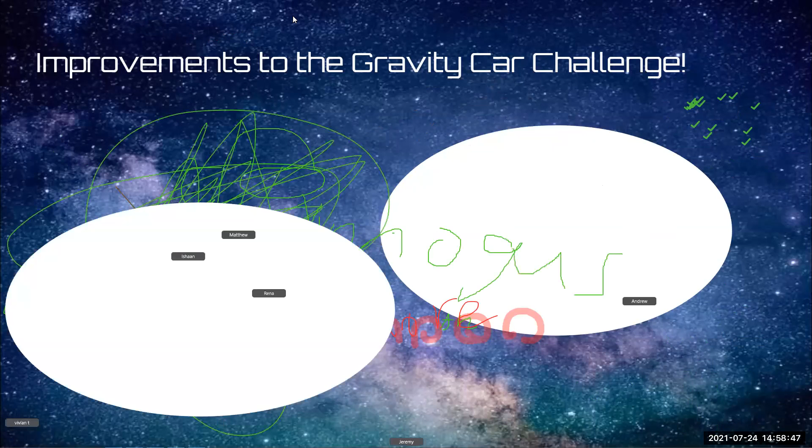And I'm going to turn off annotate again. Where in the world is the off button? Wait, Daniel, I can't turn it off. Oh, it's okay, let me do that for you. All right, okay, I can clear it. Yeah, thanks for your input, guys. I mean, this workshop, this summer event, we want to make it fun for all of you guys. So thank you for your input. Now let me see if I can remove annotations.

All right, so I would like to clarify a few questions that were in the chat as we were going. One of them is: can we have 3 wheels? This came up last time, but we didn't get to answering it. The axles can only attach to one side of the wheel, so in order to have a 3-wheeled vehicle, you'd probably have to put an axle through one of the wheels. That unfortunately is not possible, so we ask that you have a vehicle with 4 wheels, please.

In regard to controlling infill density, the entire G-code and slicer process will be done by us. You do not need to slice it yourself. We'll be controlling the infill and whatnot just to keep a level playing field, because these cars are about your creativity. So while we'd encourage you to figure out how to make cars more dense in different areas, controlling the infill with G-code is not one of them, unfortunately. As we mentioned earlier, depending on time constraints, your cars will be printed at a set infill of either 10% or 15%.